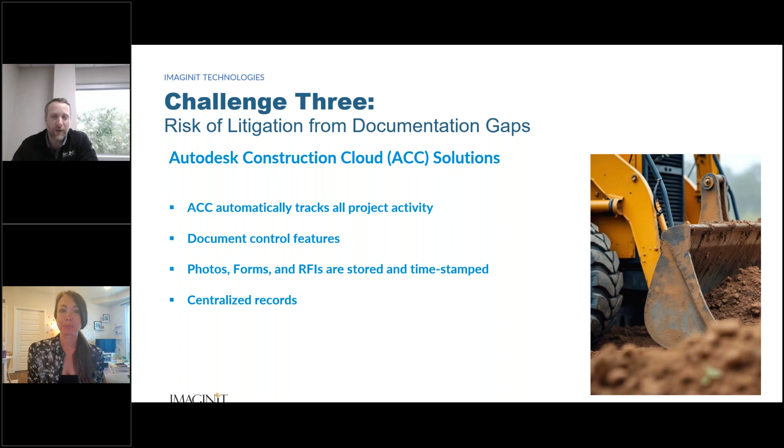I was going to make a comment. I'll save it for the next challenge.

Thanks, Vince. All right, so our last challenge we're going to talk about today is inefficient subcontractor coordination, and some of the impacts we see from that specific challenge are that subcontractors miss deadlines. If we're not able to share that new and updated information with them in a timely way in the field, they are going to miss deadlines, and then our entire project starts to fall behind.

We also see a lot of overlapping schedules and a lack of coordination. So again, if we're not pulling our information from that same project space, we might have different trades, different subs working on tasks that kind of intersect with each other. Of course, there's a critical path - there are certain tasks that need to be done before other tasks can be done. But if we're not able to share the schedule, we don't have insight to give to the subcontractors.

We see a lot of overlapping schedule. We see a lot of clashes happening out on the construction site, and that all leads to spending more money, rework, and frustrated folks. We also have a difficulty in tracking subcontractor performance.

So again, if everyone's working in their own instance, typically what happens in a project when we're working off of paper and everyone's siloed in their own solutions and environments is we don't have any good insight into how that project is trending. We're not able to really get a good grasp on sub performance until the project is over, and then of course it's too late to mitigate any of that.

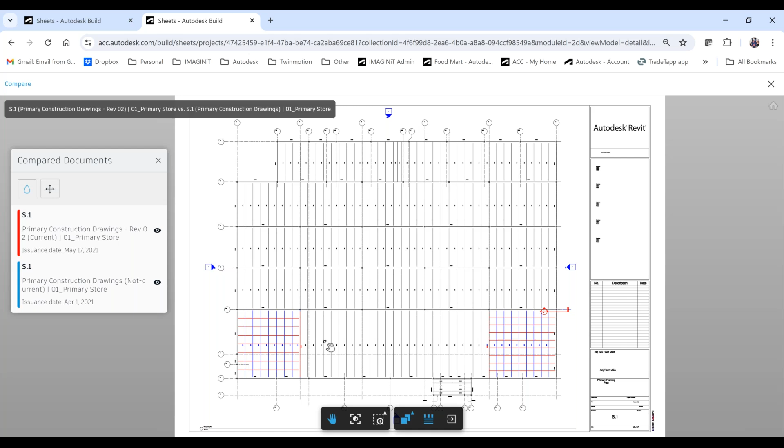Now getting into the sheets, I opened up another tab. One of the things we spoke about frequently in previous slides was the ability to support versioning within the product. Right now all of the sheets are just showing version 1. I only published one version of this document set so far in this project, but I had another demo project ready to go that had 3 different versions of the same document. So in the Sheets area, if we want to use this tool to compare what changed between version 1 and version 2, we can go into compare mode and we're able to see.

Based on the colors highlighted in this sheet, we can see what changed in that design. In this case, the previous version, Rev 1 — oh, that's Rev 2. My current version is highlighted with red lines, and the previous version of this document is highlighted in blue lines. This gives you quick insight to see what changes occurred to your documents: what was added, what was removed, what was modified.

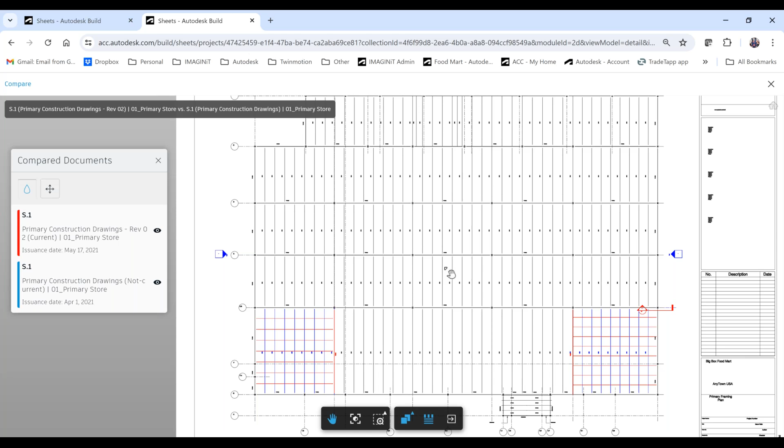I don't have anything showing that was modified within this view, but there's a third level that would show you — sorry, I'm confusing this with viewing 3D models. But if something changed within a 3D model published to the cloud, not only would it show red and blue, but there's also a yellow area showing, say, the size of a door changed, an element modified maybe in a Revit model, and that update would be highlighted within this online interface.

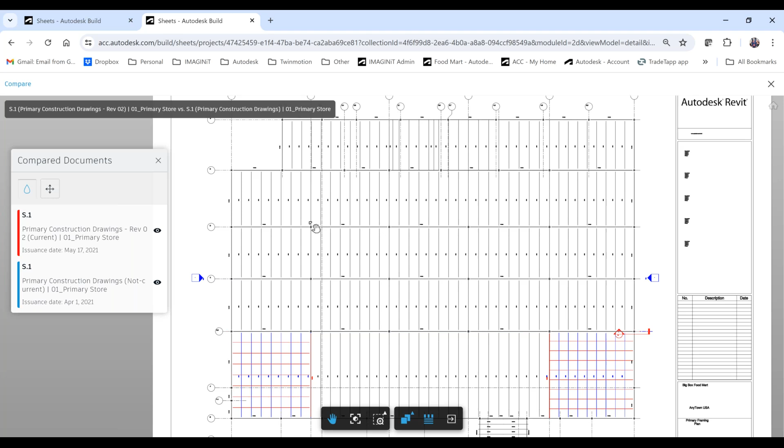I think that was it for sheets and visibility.

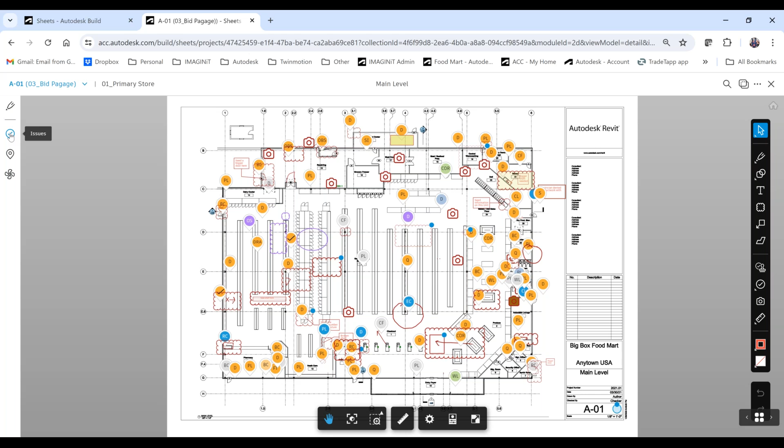If they have markups, there are little widgets that show a particular sheet has published markups. That squiggly line indicates there are 4 unpublished markups, and the little crown indicates there are 79 published markups to this sheet. So if I open this sheet, there's going to be a whole bunch of stuff overlaid on top of it. There are tools and mechanisms for us to isolate the markups or issues pinned to this document. Right here within the web, I can click on the issues tool and filter this down to a specific category — let's say a punch item captured in the field.

That gets rid of all of those other issue pins. If I want to go further and filter this down by punch list items that have not been closed, I can filter that status to just the open punch items to further refine this view.

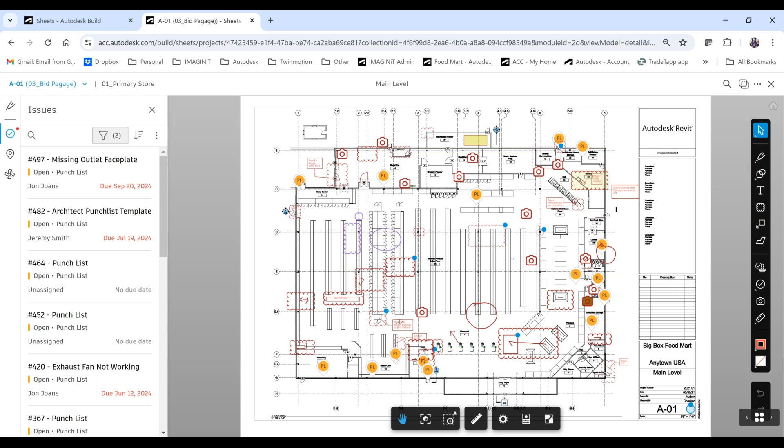Then we can click through these to get the detail of these punch items and see who was responsible for them, who it was assigned to, and when the due date was. Scott's about 3 years overdue on this particular punch item, so I might want to get on top of Scott to resolve it.

So directly from the sheet module, the sheet tool, you can view all of this data, all of these references, again creating this audit trail.

If this punch item had anything, let me see if I can find one that maybe is associated to a photo. Here we go, that's a good one. So I can see within this punch item that there's a photo that was captured in the field and assigned to it, and there's also a form associated to it. So I have this nice reference link, this audit trail, that lets me review the history of that particular punch item.

Beyond that, this is the details of the actual issue itself that was logged in the system. To the right we have an activity log, that audit trail we mentioned. I can go all the way back to when this issue was initially created, January 9th, 2023 at 2:38 p.m. That time would be local to whatever your project time was set up as.

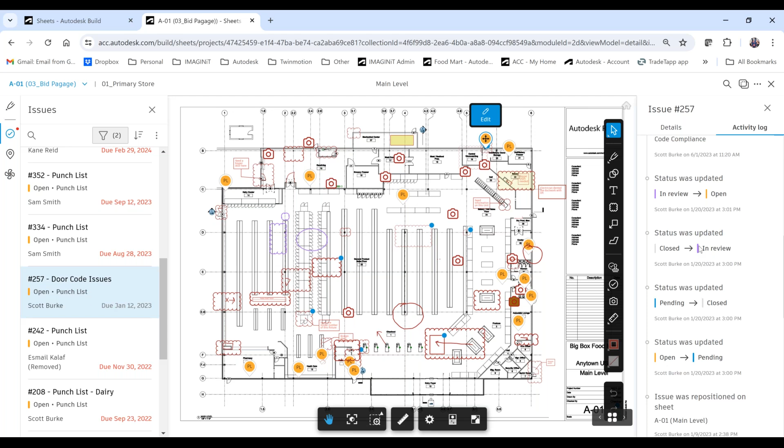And whenever stuff like that happens, we have a whole notification system baked into Autodesk that will inform people that these items have been reopened.

I'm meant to be concise here, so let me just show that any issue we create within a document does get tracked within the issues tool in ACC. Much like within the sheet view, when viewing our issues this is just a collection of all the issues created in the project. A great form of collaboration and coordination is utilizing issues to keep track of day-to-day activities within the project.

And if we want to filter down this list, we have the same mechanism to filter our punch items. We can highlight everything that is overdue very easily, which probably is a lot. So 25 overdue punch items within this project.

Beyond that, for transparency, if we wanted to kick out an on-demand report of these issues, there's a button where we can export this report and decide what that issue detail or summary looks like. Do we want to just capture issues pinned to sheets? Do we want to save that report to a file folder in the project? We also have controls over formatting, whether to include a cover page and file links, and how many photos to include per row. So there's a lot of great stuff here, capturing references like forms and other files tied to the issue, all in one report.

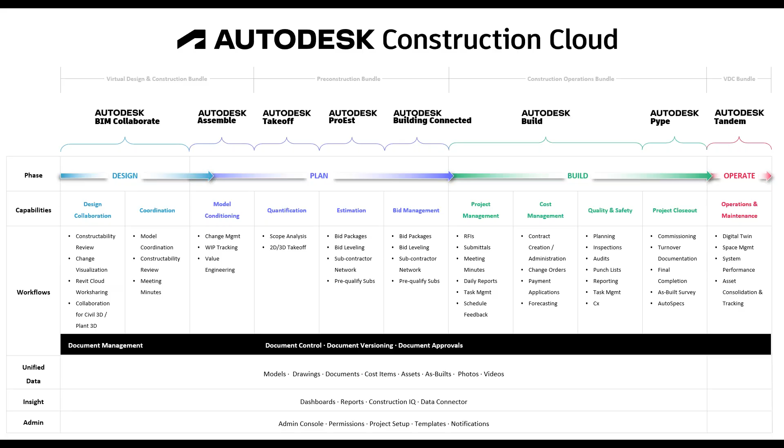Okay, so a couple of last items here. Everything we've really talked about so far is the solution and what the Autodesk solution supports. This solution can be very customized and configured to suit your needs. Out of the box, I would say generally the solution is geared more towards general contractors than any other specific discipline of users. But even with a general contractor, there's a level of work that goes into preparing your own environment to support your project details and how you guys perform projects as general contractors.

So something that we do as a service consulting company is assist you with that process. We have our tried and true—call it our advanced implementation. We used to call this, or maybe still do, our IMAGINiT Take AIM, which stands for Assured Implementation Methodology. Our methodology to an implementation really starts with understanding your business and how you want to work in your projects and the different challenges you've historically run into with projects.

During the planning phase of an implementation, we'll capture those pain points. We'll go through a discovery period and really try to understand how you want the solution to support your needs. Once we understand that, we'll roll into a development phase where we'll work with you directly to configure your environment, review that customization with you, and validate that permissions are set correctly and workflows are set up properly.